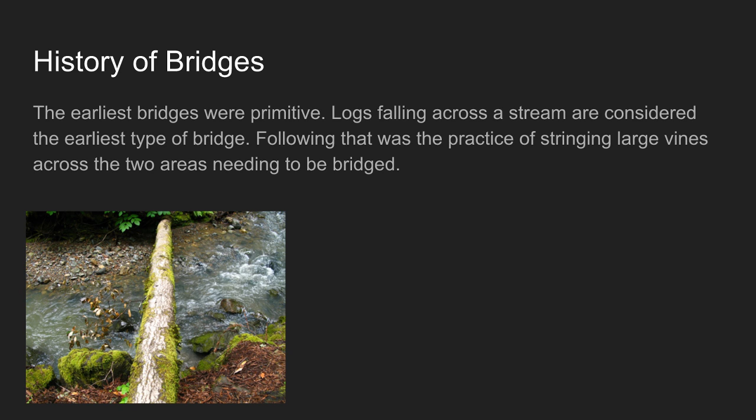The earliest bridges were primitive. Logs falling across a stream are considered the earliest type of bridge. Following that was the practice of stringing large vines across the two areas needing to be bridged. Engineered arches originated in the Middle East approximately 4000 BC.

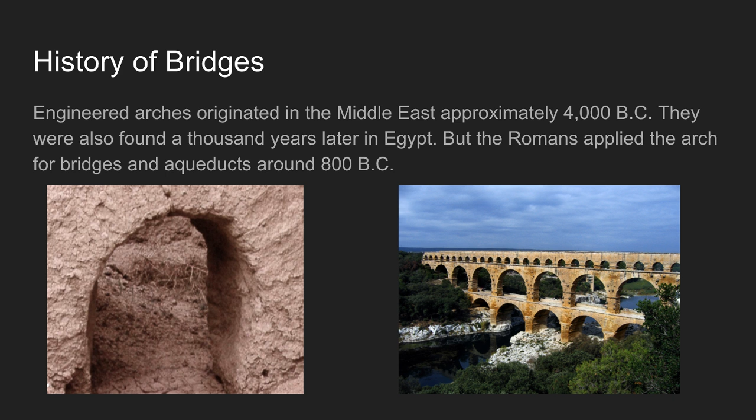They were also found 1,000 years later in Egypt, but the Romans applied the arch for bridges and aqueducts around 800 BC. They constructed many kinds of bridges, such as wooden and beam bridges. The Roman stone arch bridges withstood heavy use, the elements, and time to become the notable bridge of that era. Many of the stone arch bridges and aqueducts built by the Romans can still be seen in Europe.

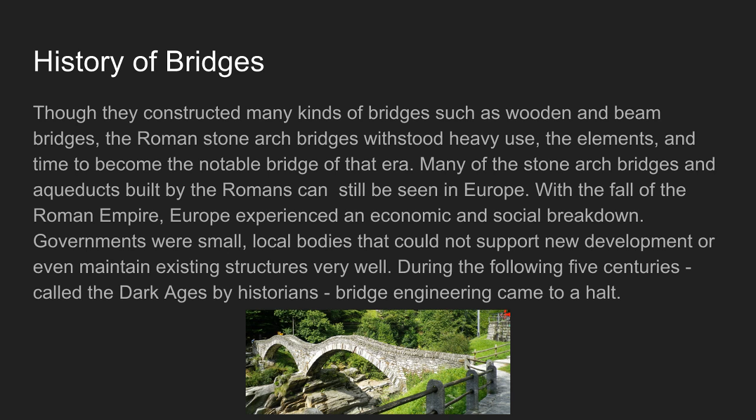With the fall of the Roman Empire, Europe experienced an economic and social breakdown. Governments were small local bodies that could not support new development or even maintain existing structures very well. During the following 5 centuries, called the Dark Ages by historians, bridge engineering came to a halt. But other areas of the world continued to create new bridge forms during this time.

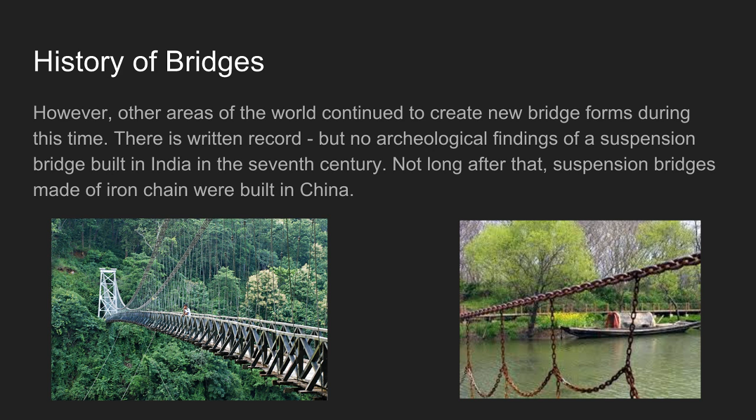There is written record but no archaeological findings of a suspension bridge built in India in the 7th century. Not long after that, suspension bridges made of iron chain were built in China. The simple clapper bridge led to the reemergence of bridge building in Europe, if not true bridge engineering.

Clapper bridges are considered by many to be a prehistoric style of bridge; the Tarr Steps in Somerset, England, for example, date back to 1000 BC. Most of the clapper bridges in Europe were built during the Middle Ages. These bridges feature large flat slabs of stone placed across the top of stone piers. Clapper-style bridges were also built in China during the Middle Ages.

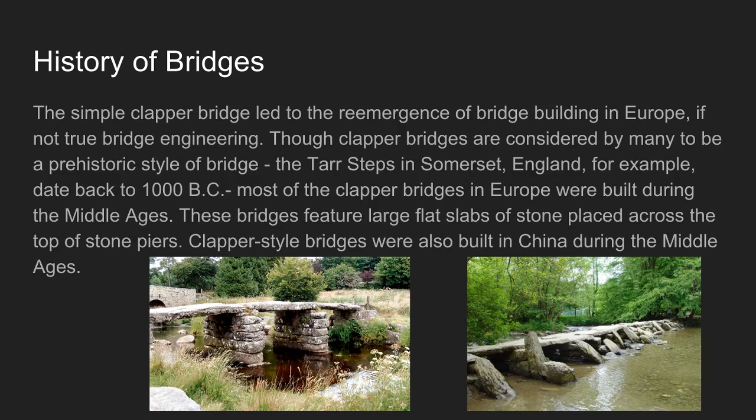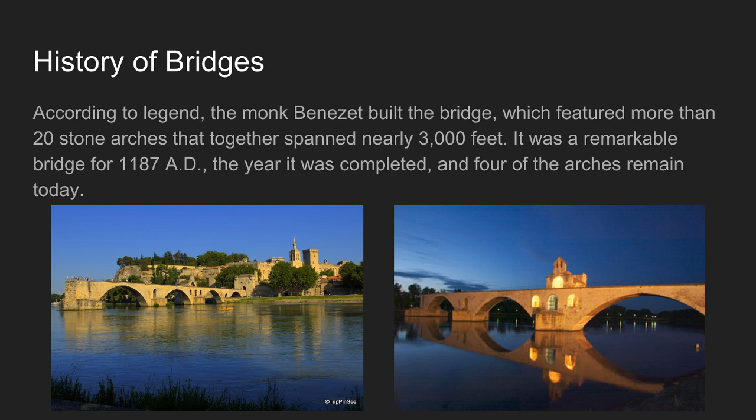European bridges with engineering principles in mind, however, did not really return until the construction of Pont d'Avignon in France. According to legend, the monk Benezet built the bridge, which featured more than 20 stone arches that together spanned nearly 3,000 feet. It was a remarkable bridge for 1187 AD, the year it was completed, and 4 of the arches remain today.

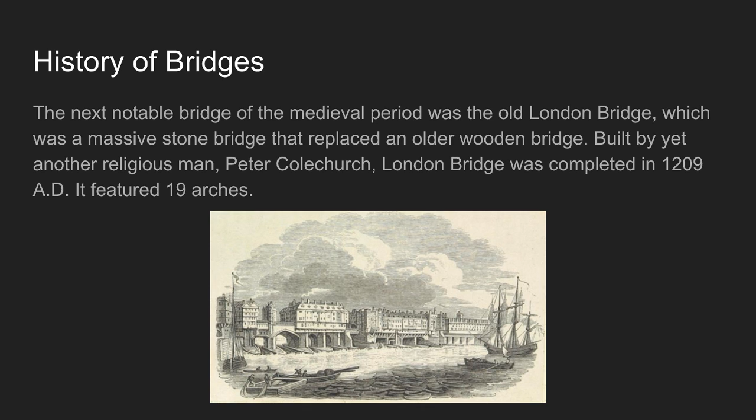The next notable bridge of the medieval period was the Old London Bridge, a massive stone bridge that replaced an older wooden bridge. Built by yet another religious man, Peter Colechurch, London Bridge was completed in 1209 AD. It featured 19 arches. This bridge lasted more than 600 years. It was rebuilt in 1823. It needed frequent repair, which makes clear the logic behind the nursery rhyme, London Bridge is falling down.

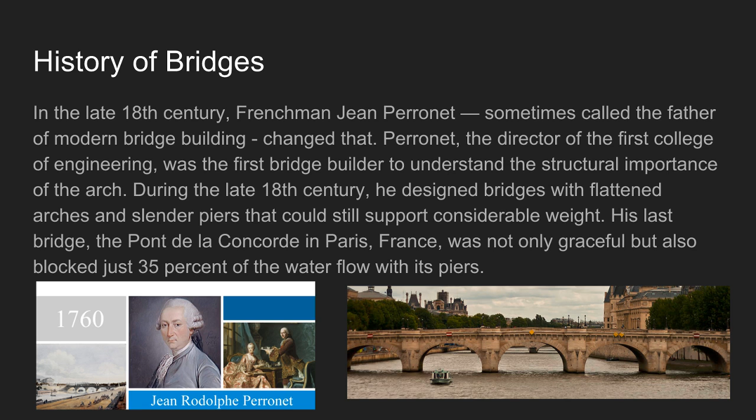In the late 18th century, Frenchman Jean Perronet, sometimes called the father of modern bridge building, changed that. Perronet, the director of the first College of Engineering, was the first bridge builder to understand the structural importance of the arch. During the late 18th century, he designed bridges with flattened arches and slender piers that could still support considerable weight. His last bridge, the Pont de la Concorde in Paris, France, was not only graceful but also blocked just 35% of the water flow with its piers.

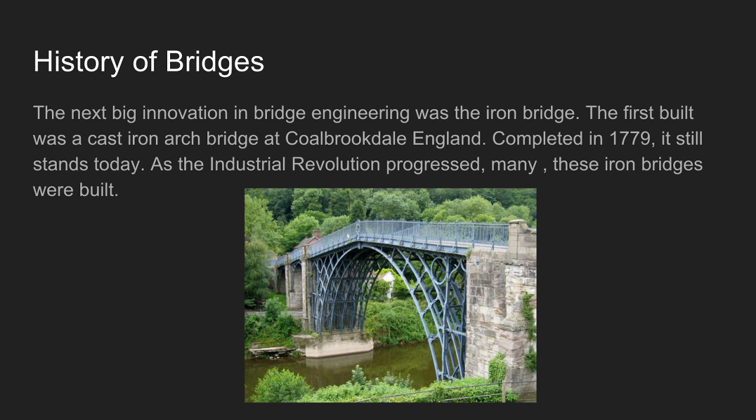The next big innovation in bridge engineering was the iron bridge. The first built was a cast iron arch bridge at Coalbrookdale, England. Completed in 1779, it still stands today. As the Industrial Revolution progressed, many of these iron bridges were built.

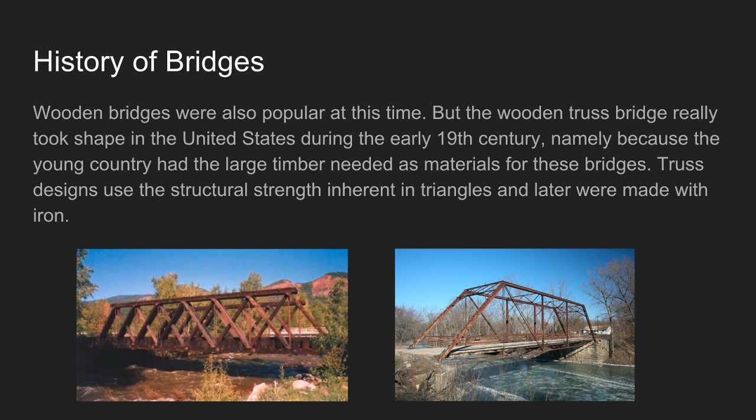Wooden bridges were also popular at this time, but the wooden truss bridge really took shape in the United States during the early 19th century, namely because the young country had the large timber needed as materials for these bridges. Truss designs used the structural strength inherent in triangles and later were made with iron.

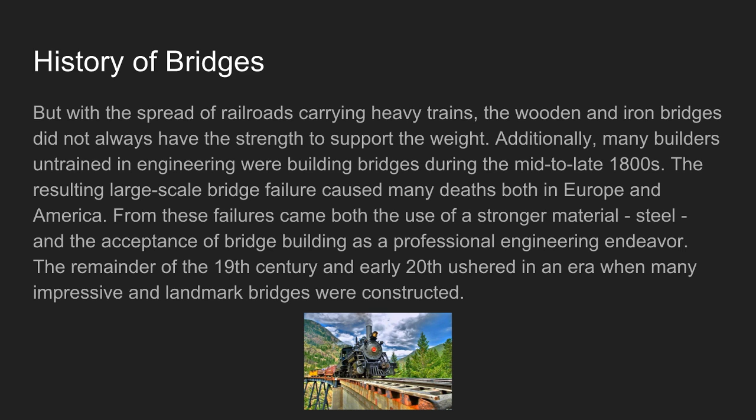But with the spread of railroads carrying heavy trains, wooden and iron bridges did not always have the strength to support the weight. Additionally, many builders untrained in engineering were building bridges during the mid to late 1800s. The resulting large-scale bridge failure caused many deaths both in Europe and America. From these failures came both the use of stronger material, steel, and the acceptance of bridge building as a professional engineering endeavor.

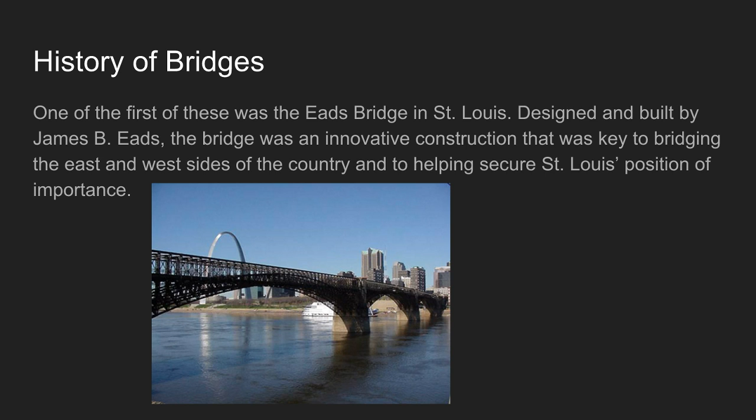The remainder of the 19th century and the early 20th ushered in an era when many impressive and landmark bridges were constructed. One of the first of these was the Eads Bridge in St. Louis. Designed and built by James B. Eads, the bridge was an innovative construction that was key to bridging the east and west sides of the country and to helping secure St. Louis's position of importance. Eads, who had built boats for the Union Army during the American Civil War, worked as a salvager of boats on the Mississippi River and knew the river better than most.

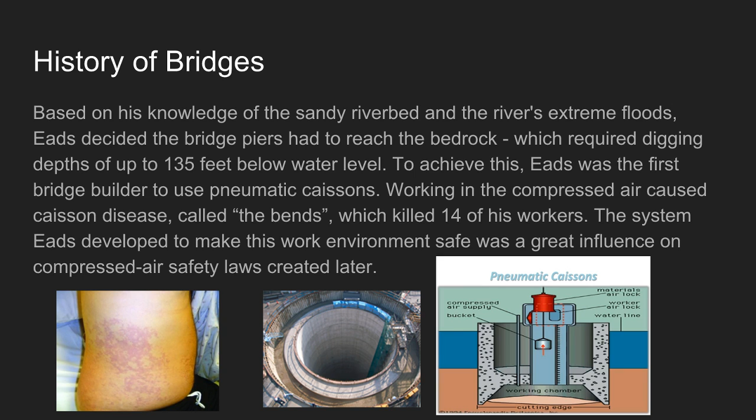Based on his knowledge of the sandy river bed and the river's extreme floods, he decided the bridge piers had to reach the bedrock, which required digging depths of up to 135 feet below water level. To achieve this, Eads was the first bridge builder to use pneumatic caissons. Working in the compressed air caused caisson disease, called the bends, which killed 14 of his workers. The system Eads developed to make this work environment safe was a great influence on compressed air safety laws created later.

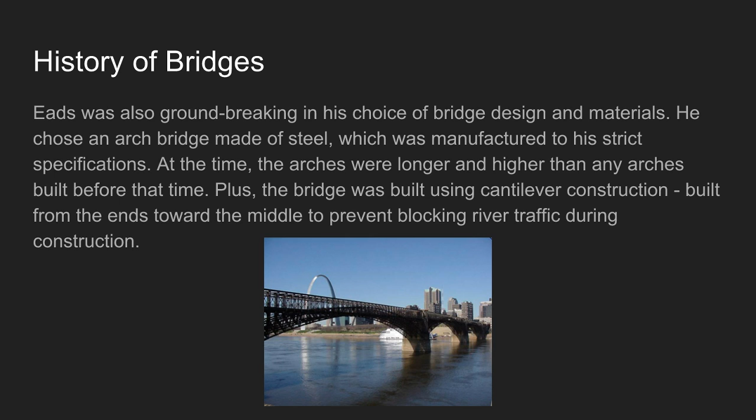He was also groundbreaking in his choice of bridge design and materials. He chose an arch bridge made of steel, which was manufactured to his strict specifications. At the time, the arches were longer and higher than any arches built before that time. Plus, the bridge was built using cantilever construction, built from the ends toward the middle to prevent blocking river traffic during construction.

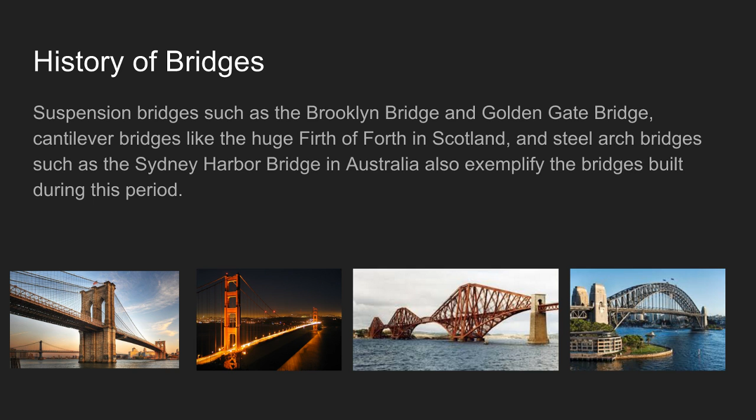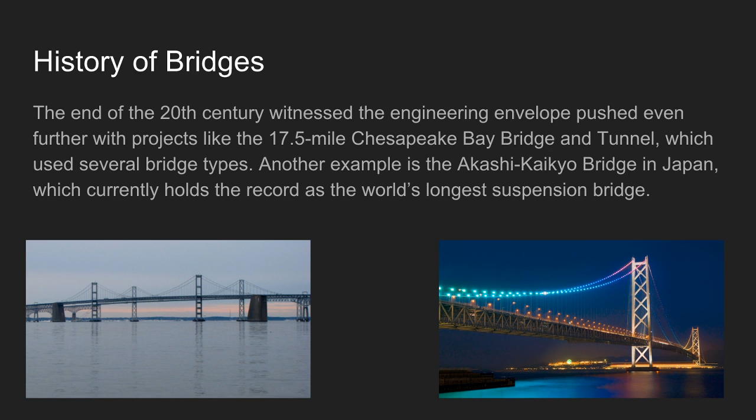Suspension bridges, such as the Brooklyn Bridge and Golden Gate Bridge, cantilever bridges like the huge Firth of Forth in Scotland, and steel arch bridges such as the Sydney Harbour Bridge in Australia, also exemplify the bridges built during this period. The end of the 20th century witnessed the engineering envelope being pushed even further with projects like the 17.5-mile Chesapeake Bay Bridge and Tunnel, which used several bridge types. And another example is the Akashi Kaikyo Bridge in Japan, which currently holds the record as the world's longest suspension bridge.

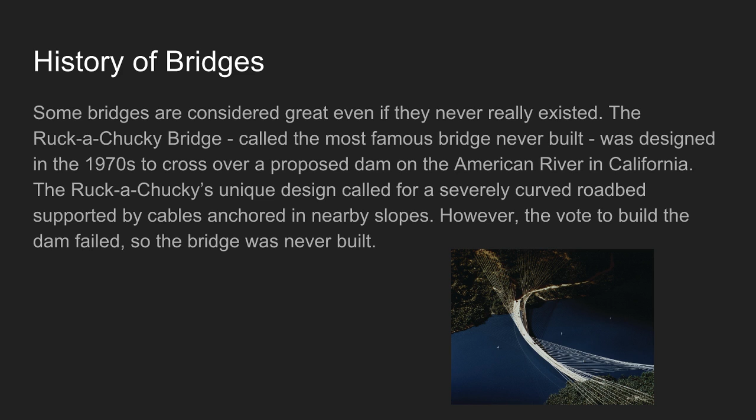Some bridges are considered great even if they never really existed. The Ruck-a-Chucky Bridge, called the most famous bridge never built, was designed in the 1970s to cross over a proposed dam on the American River in California. The bridge's unique design called for a severely curved roadbed supported by cables anchored in nearby slopes. However, the vote to build the dam failed, so the bridge was never built.

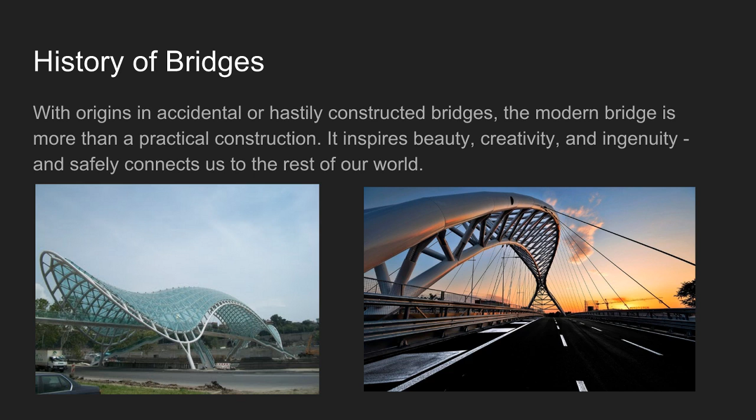With origins in accidental or hastily constructed bridges, the modern bridge is more than a practical construction. It inspires beauty, creativity, and ingenuity, and safely connects us to the rest of the world.